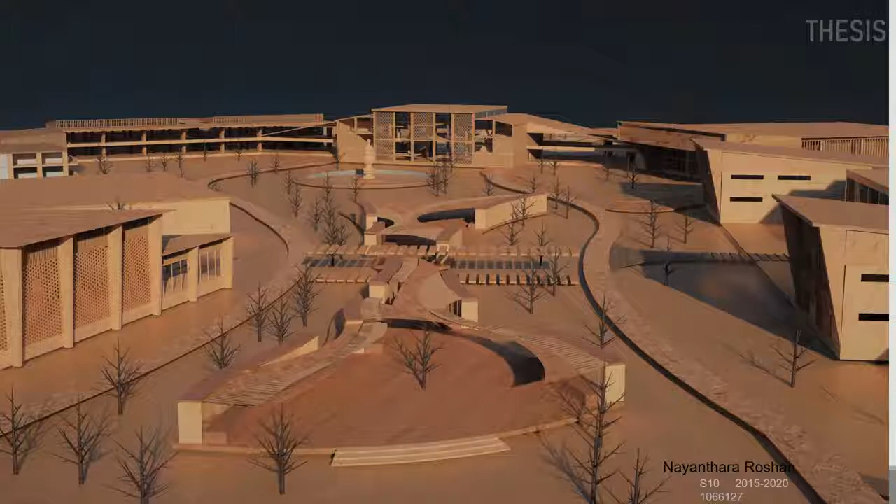Thesis topic: International Exhibition and Convention Center, an experiential event space. Submitted by Roshan.

The aim of the project is to bridge the gap between different user groups like students, delegates, and professionals by designing a single platform capable of accommodating versatile functions and stimulating resourceful interaction. Architecture that connects people. Flexibility, connectivity, and community are the three main parameters which are focused.

The objective of the project is to understand and design the center with multiple or versatile spaces to accommodate all types of events with an impressive balance of interactive spaces which will develop the overall working of the convention center, the space that meets the need.

KINFRA has put forward a proposal for instituting an international exhibition and convention center in Kakkanad, Kochi. Why Kochi? Kochi is to be a hub of the MICE industry. MICE, an acronym for Meeting, Incentives, Convention and Exhibition in the tourism segment.

Convention centers receive guests from local, national and international markets which depends upon the type of events that are hosted, the delegates, the exhibitors, the staff and the visitors.

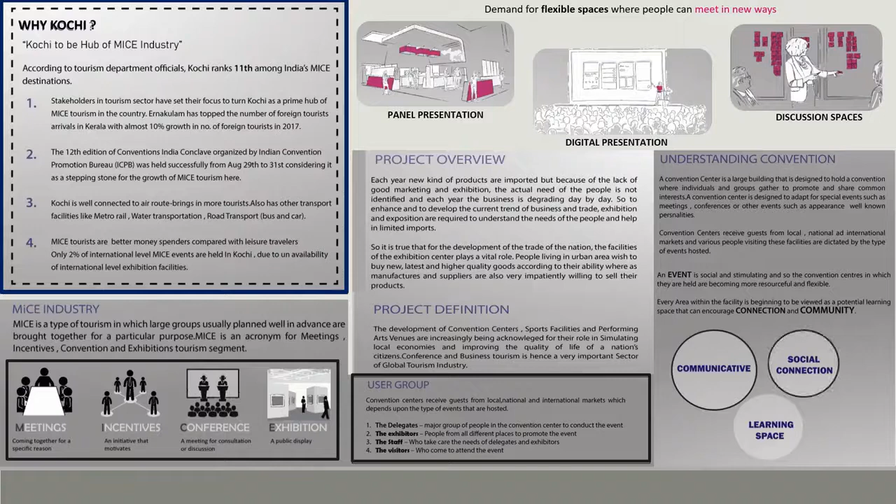An event is social and stimulating, and so the convention centers in which they are held are becoming more resourceful and flexible. Every area within the facility is beginning to be viewed as a potential learning space that can encourage connection and community.

The parameters to be considered while designing are: 1. Making flexibility a priority. 2. Centers are an extension of destination. 3. Public areas for public discourse. 4. Healthy and stimulating plan. 5. Neighborhood development plan. The design should include 3 concepts of design: open plan, cluster and courtyard.

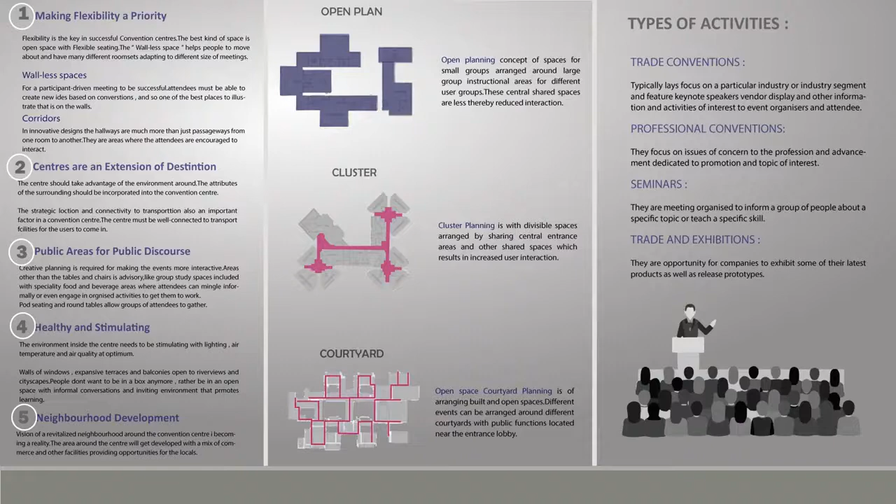The type of activities are trade conventions, professional conventions, seminars and exhibitions. In short, here are 6 typologies of spaces which are to be included in designing a convention center.

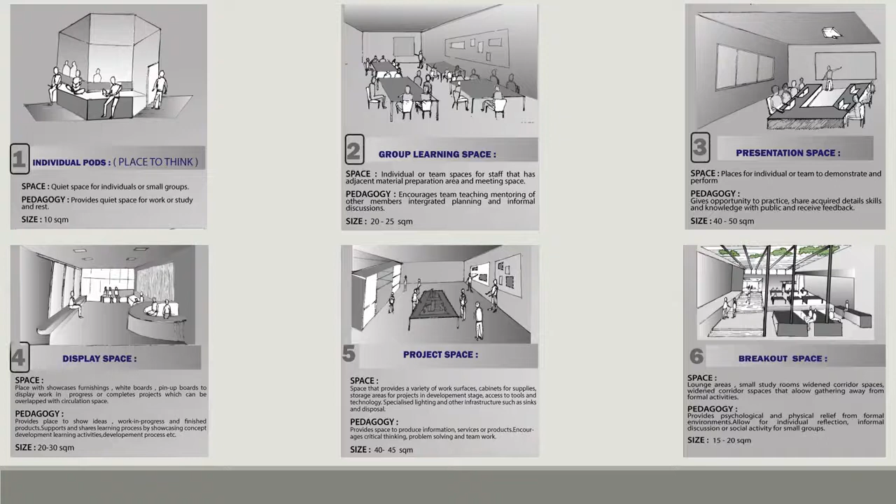1. Individual pods. 2. Group learning space. 3. Presentation space. 4. Display space. 5. Project space and 6. Breakout space.

The location of the site, a 41-acre land, is in Kusumagiri, Kakkanad, mainland near to Infopark Development Phase 2.

Local area analysis. The site can be accessed by different modes of transportation, both public and private, where all the necessary requirements can be reached within a 5-kilometer radius, with the airport and railway station within a 20-kilometer radius.

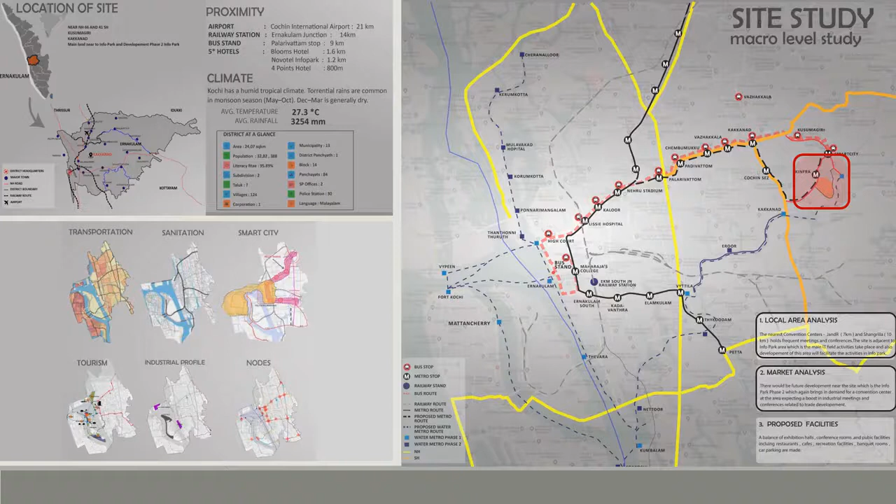Market area analysis states that it would be the future development area near the site, which is the Infopark Phase 2 development and water metro.

The site is located in a commercial zone with a negligible contour level of less than 1 meter, thereby taken as a flatland. Road network: the northern side of the site lies on the primary road, which is the Infopark Expressway, which connects to the Seaport Airport Road.

Movement. Bus service and metro rail service is available in front of the site. Land use. Infopark lies within a 1 kilometer distance, which is a major IT hub where the majority of users are expected.

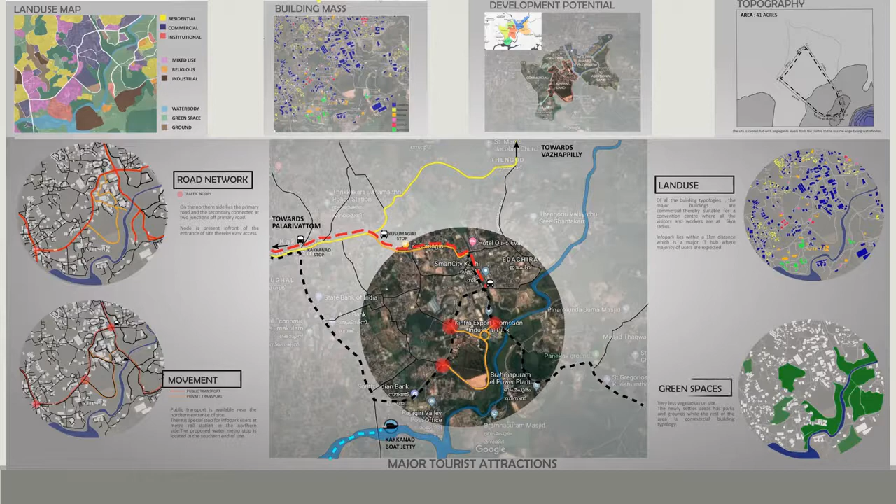Green spaces. There is very little vegetation on the site and in the neighborhood, where the rest of the area is a busy commercial zone.

Major attractions of the site. The site is located adjacent to the IT hub Infopark, which is a major development area where the majority of the user group is expected for the site.

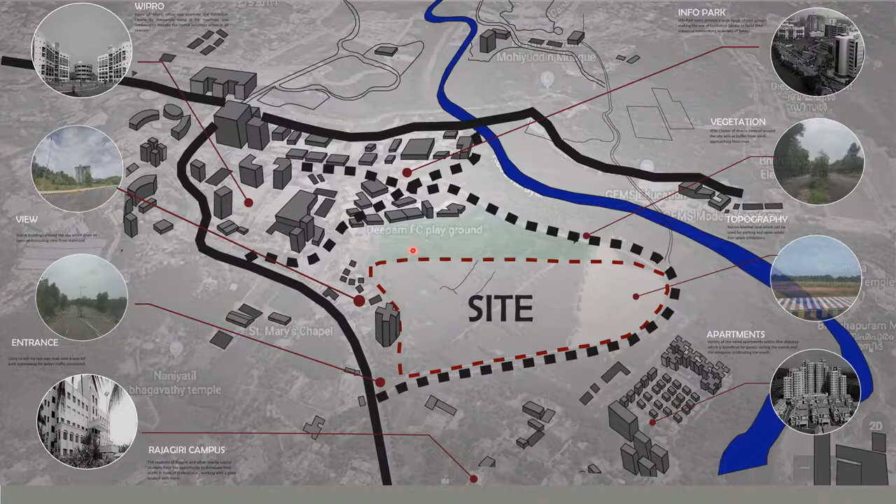The site also lies adjacent to the Rajagiri campus on the northern side. Within a 5-kilometer radius, different accommodation facilities and modes of transportation are also available.

Micro-level study. Sunpath: the orientation of the site is in the north-south axis, which receives maximum sunlight and wind. Circulation: the circulation is possible from several points as the site is abutting the road on all 3 sides, which helps to handle traffic.

Vegetation. There is currently very little vegetation within the site, with a cluster of acacia and taro leaves.

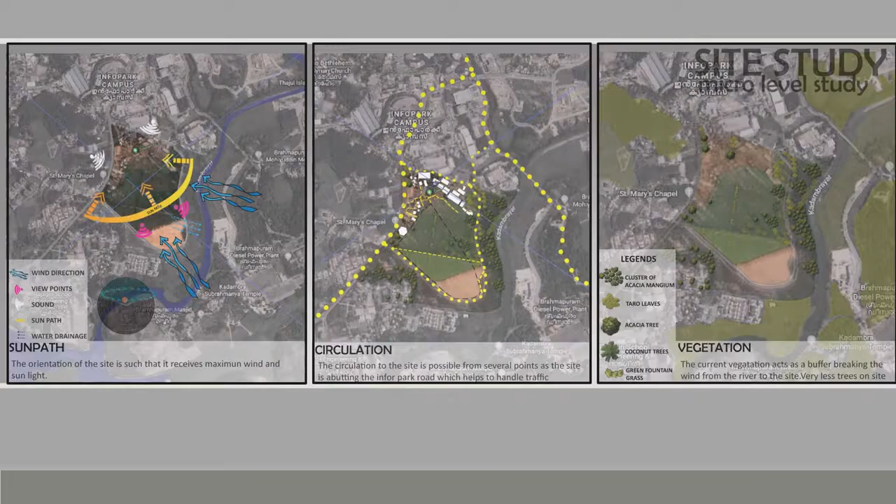SWOT analysis. Strength: Accessibility. Availability of various transportation facilities makes the site easily accessible to the public. The site is abutting the road on all sides, which helps to connect the major nodes and junctions.

Site context. The context of the site mainly acts as an industrial development area, which is key for commerce. Immediate context: within 5 kilometers, different accommodation facilities and modes of transportation are available.

Weakness. Groundwater: the site is a flat land with negligible contour and lies in a low-lying area which can cause flooding during the time of rain.

Waste disposal. The site is located near the Brahmapuram area, which is currently a large waste disposal zone for industries and the public. Opportunity: Site context.

The site is located adjacent to the IT hub, commercial street and institution, where there is a wide range of user groups.

Threat: traffic. Due to the wide range of events and scale of the project, there may be traffic problems on the Northern Artery Road.

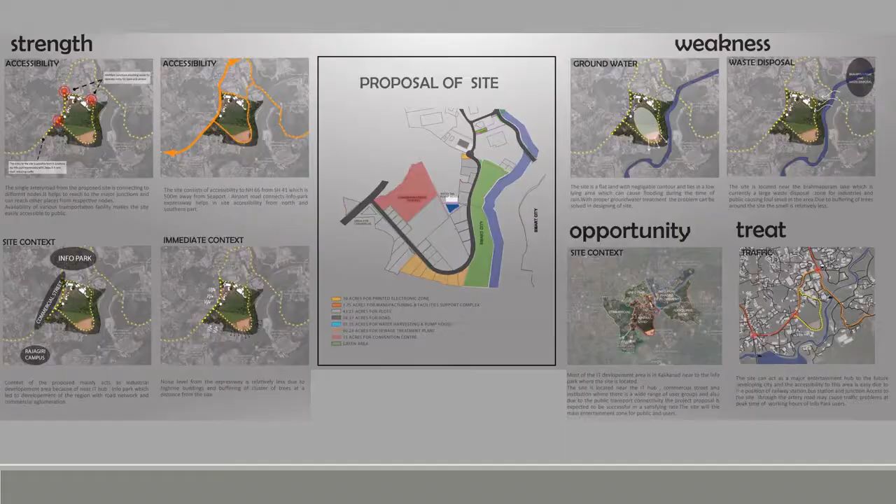Design strategies. The key concept of the project is to connect users, context, and building. This is done by bringing connection between the private and public meeting zones by creating common sharing spaces as thresholds.

The common sharing space here is taken as a green belt which separates the private and public zones. The private zone consists of the administration area, accommodation and food for VIPs, and the executive zone with meeting and conference rooms. The public sector is split into three zones: student zone, exhibition zone, and multipurpose halls.

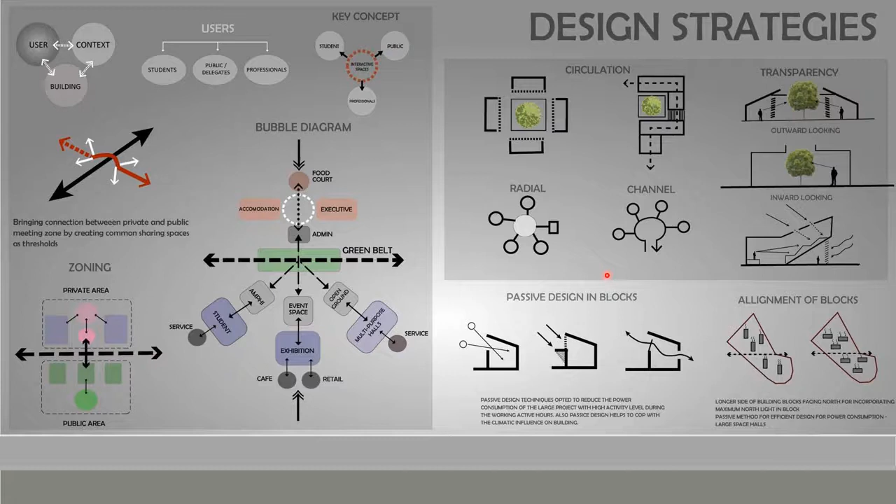The circulation planning is done in two methods: radial pattern and channeling. The design is to be transparent with both inward and outward looking designs. Passive design techniques are also opted to reduce the power consumption of the large project with high activity levels during peak hours.

The evolution of design. Multiple access is provided to the site from the major abutting road for various user groups. Two major entry points are placed on the north and south sides, with a focal point placed centrally. The green belt splits private zones to the north side and public zones to the south side, with multiple access points.

Circulation is worked out within the public and private zones. Built height increases from north to south with respect to the typology of events. Open space courtyards are worked within the private and public areas respectively.

At present, the site lies adjacent to the Infopark development area, which is the major node. The site abuts the road on three sides, where the Infopark Expressway is on the northern side. The site can be accessed from the north and south sides by two major junctions, Junction 1 and Junction 2. The site is surrounded by commercial development and other accommodation facilities.

On the eastern side of the site is the Kadambrayar River, where thick vegetation is present in the southeast part of the site. In future, with the establishment of the project, the junction lying in the northern part of the site will develop as a major node for transportation and will also act as a landmark.

The road between the commercial plots will develop as a service entry to the site. Due to the proposal of the water metro via the Kadambrayar River, Junction 2 will develop as a major node for a metro station. The southern portion of the site will be developed as a waterfront area with respect to the water metro proposal.

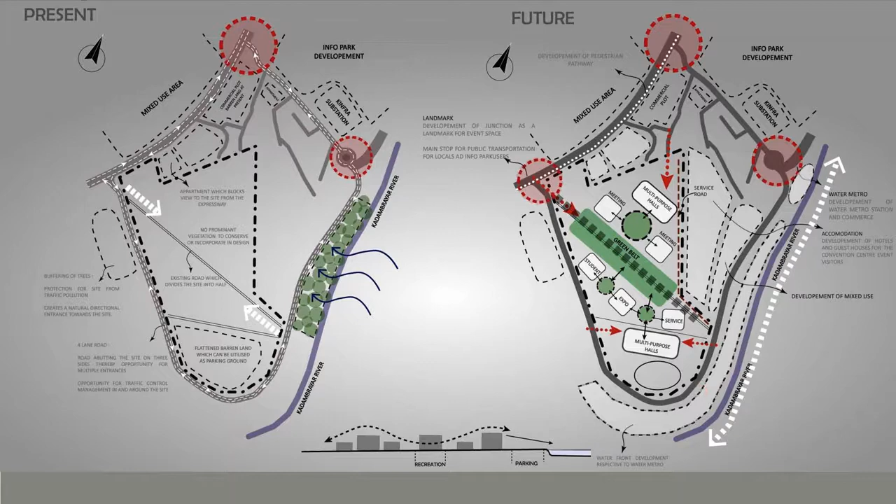Concept development. The key concept is to create interactive spaces through a radial pattern, by creating a focal point at the center - a green space - which then segregates radially into smaller courtyards where different functional blocks are connected.

The building spaces are designed as a transition from semi-open to closed spaces. This convention center has two main entrances, in the north and south, with a VIP entrance on the north side adjacent to the service entry.

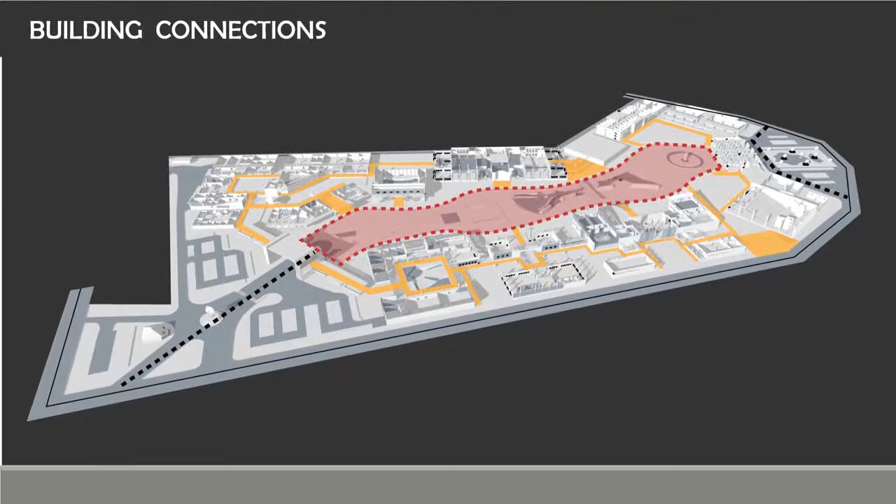Zoning. Phase 1: Executive. Phase 2: Educational. Phase 3: Exhibition. Phase 4: Service.

Interactive spaces. Here, the framework has been designed in three different typologies of courtyards. 1. Open plan typology: here, spaces for small groups are arranged around a large group installation area.

2. Campus typology: the general approach here is where different typologies of functions are grouped together and located in different blocks. 3. Courtyard typology: here, built and open spaces where different functional spaces are arranged around different courtyards in a linear pattern, connected by semi-open corridors.

Design moves. 1. Mixed functional groups: each cluster consists of different functions split out into shared open spaces and closed spaces.

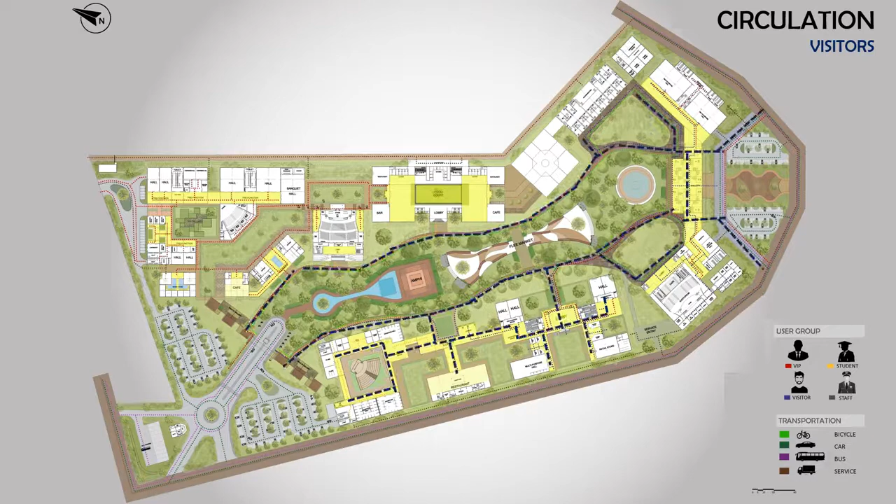The circulation of the project is developed in a loop pattern around the green space, which is the main core of the project. Central circulation pathways are designed, leaving the edges for halls and other rooms for view and ventilation, reducing air-conditioned space. The circulation path is in a loop form, also connecting to the courtyards, creating a transition from closed to semi-open to open spaces.

The central loop is completely pedestrianized, where vehicular access is restricted at the edges of the site. Off-street and basement parking facilities are provided, with over 2,000 spaces for 4-wheelers and 250 for 2-wheelers.

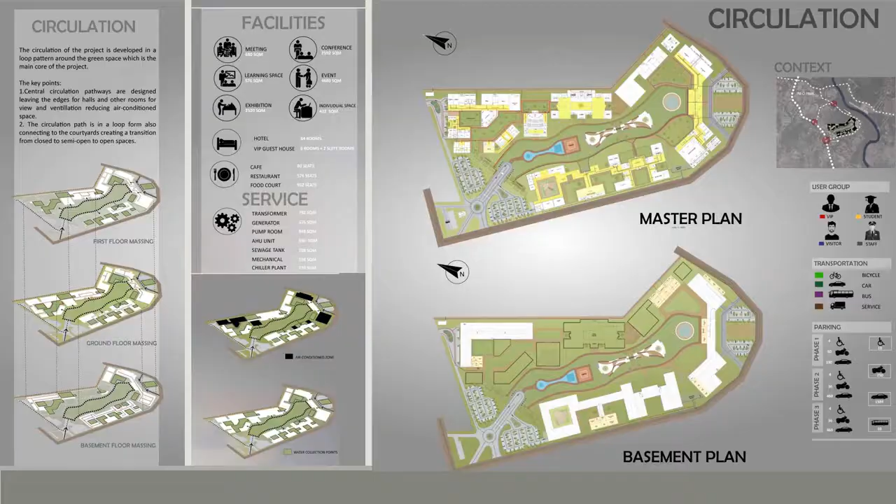Activity study: built spaces with different functions have respective courtyards for various typology of events.

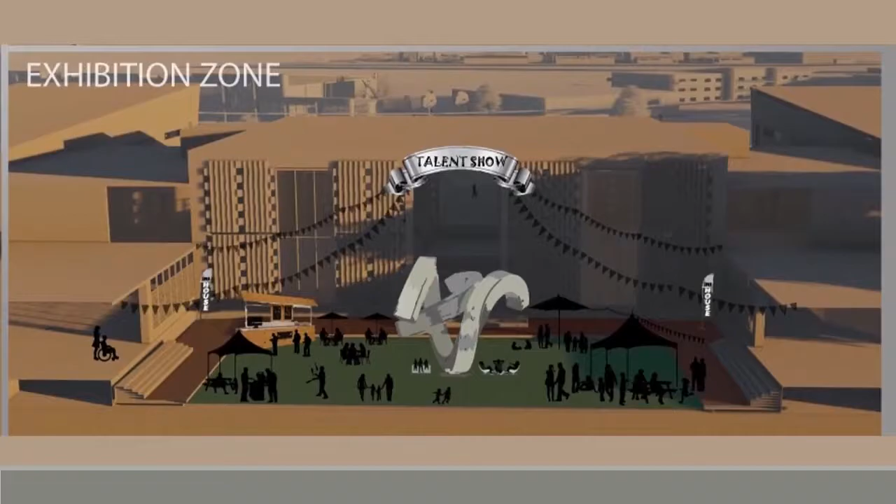User study: the strength of user population increases from north to south, from phase 1, 2, 3 and 4. As the intensity of activity level increases from north to south, the building height and area increases respectively from 3 meter to 4.5 to 6 meter and to 12 meter ceiling height.

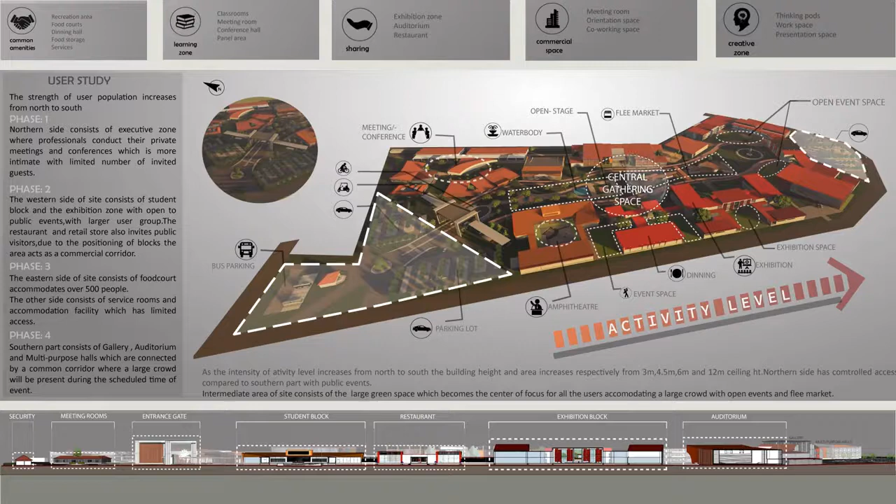The northern side has controlled access compared to the southern part with public events. The intermediate area of the site consists of the large green space, which becomes the center of focus for all the users, accommodating a large crowd with open events.

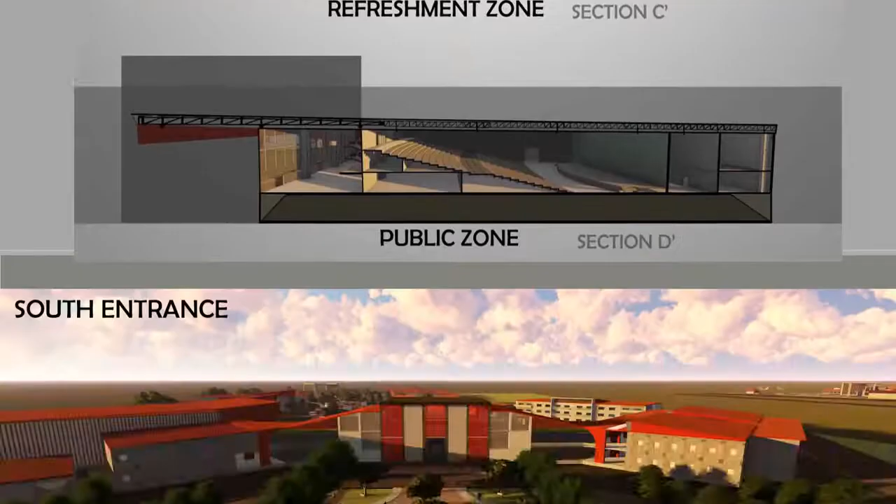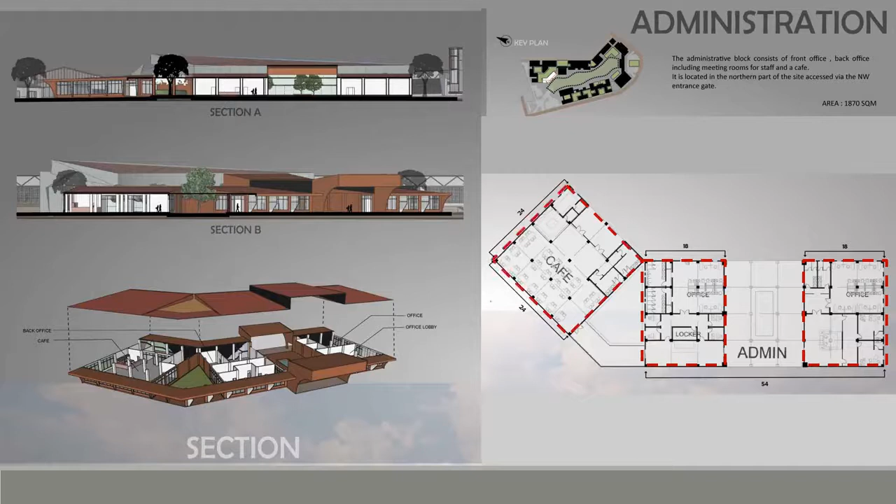The administrative block is located in the northern part of the site, accessed through the northwest entrance gate, with front office, back office, meeting rooms for staff and a cafe.

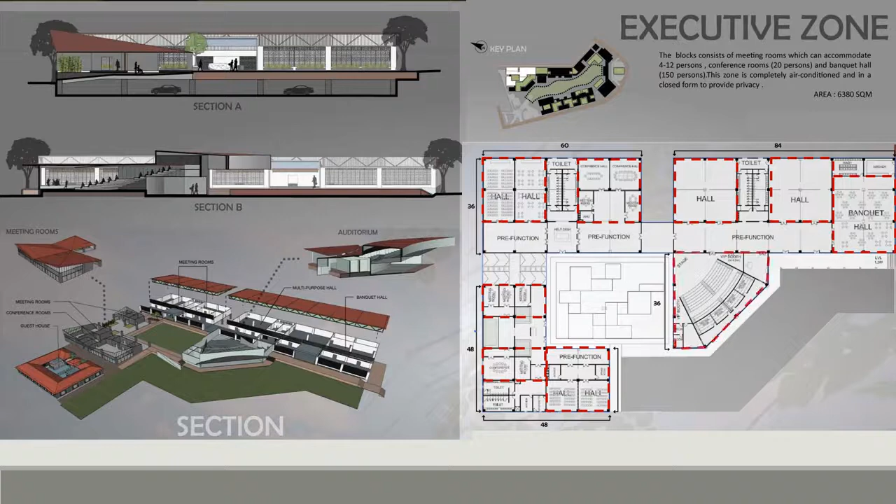The executive zone consists of meeting rooms which can accommodate 4 to 12 persons, a conference room for 20, and a banquet hall for 150 persons. This zone is completely air-conditioned and in a closed form to provide privacy.

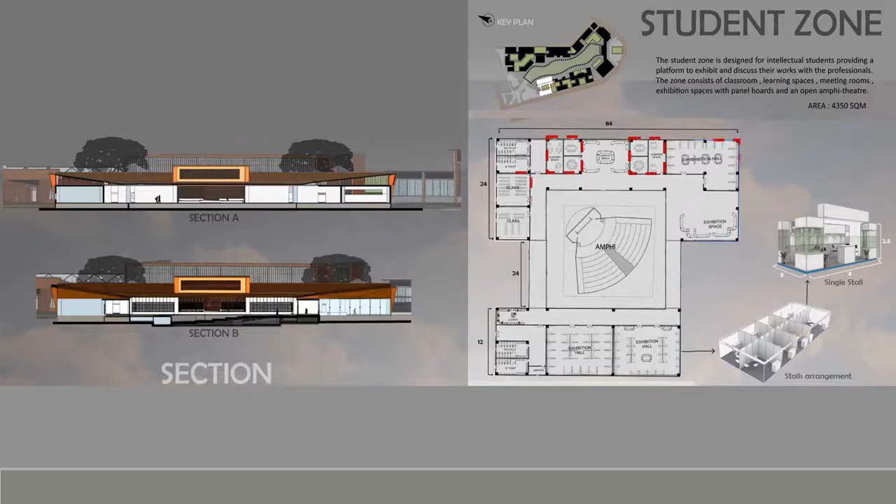The student zone is designed for intellectual students, providing a platform to exhibit and discuss their works with professionals. The zone consists of classrooms, learning spaces, meeting rooms, exhibition spaces, and an open amphitheater.

The restaurant block in the student zone is located between the meeting rooms and multi-purpose halls, which is accessed through the main lobby and through the courtyard. It also has seating capacity for 240 people.

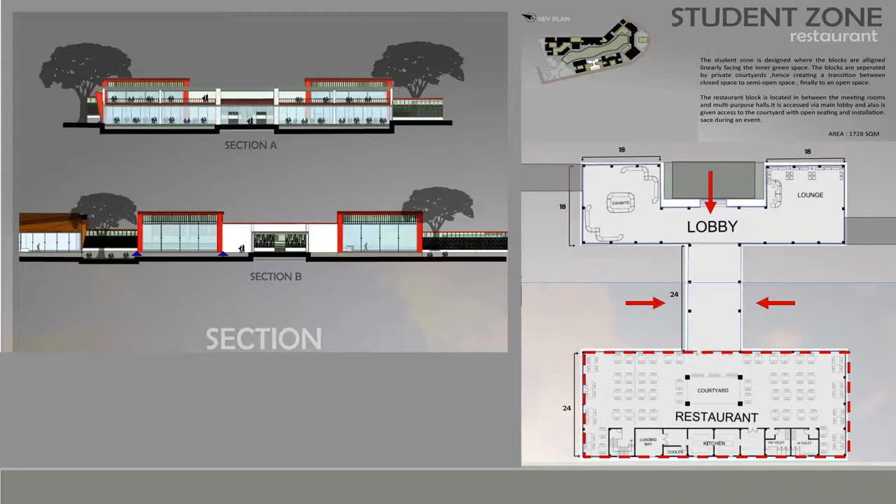The exhibition block is designed with multi-purpose halls, thinking pods, and a retail store. Visitors can book these multipurpose halls according to the availability and size of the halls. The halls can be partitioned into various arrangements according to the type of event.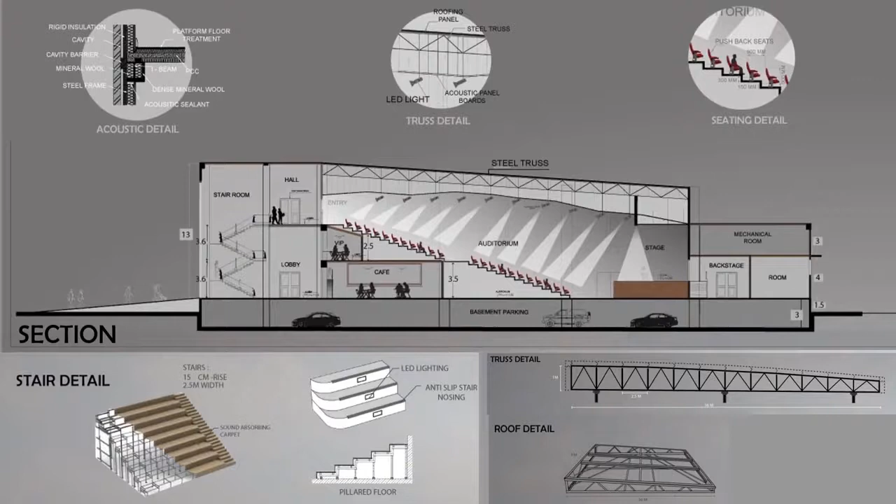The auditorium is located in the northern part of the entrance, adjacent to the admin, which has 950 seating and 215 for VIP. This auditorium seating rack is also below the ground level with a difference of 2 meters.

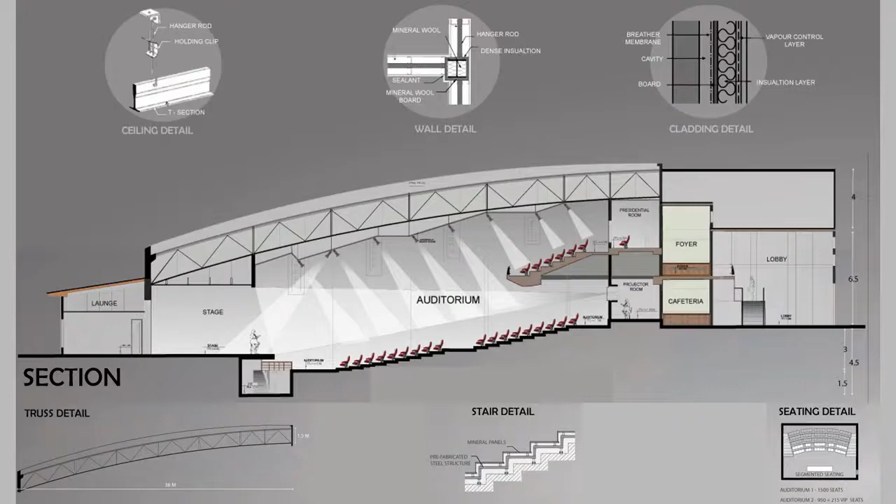The food court is provided with 3 entrances located at the very center of the site so every user can access it. It lies facing the central green space and the flea market, where it is considered to be the most active part of the whole convention center.

The gallery is located in the southern entrance of the site, which is designed using different floor levels where each section of floor is used as an exhibition space. The gallery has floors up to 10.5 meter high, where each floor is raised by 1.5 meter from subsequent floors.

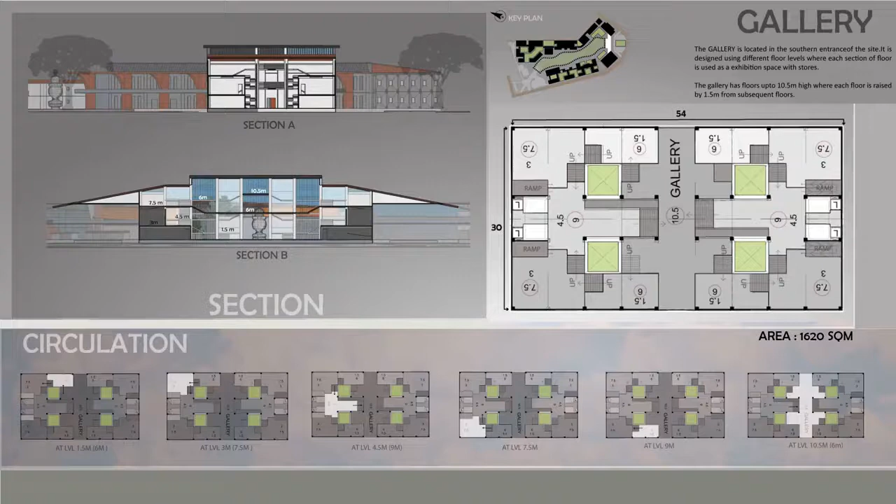The multipurpose hall is located in the southern portion of the site, which consists of 2 large halls which can be partitioned into various formations according to the type of event.

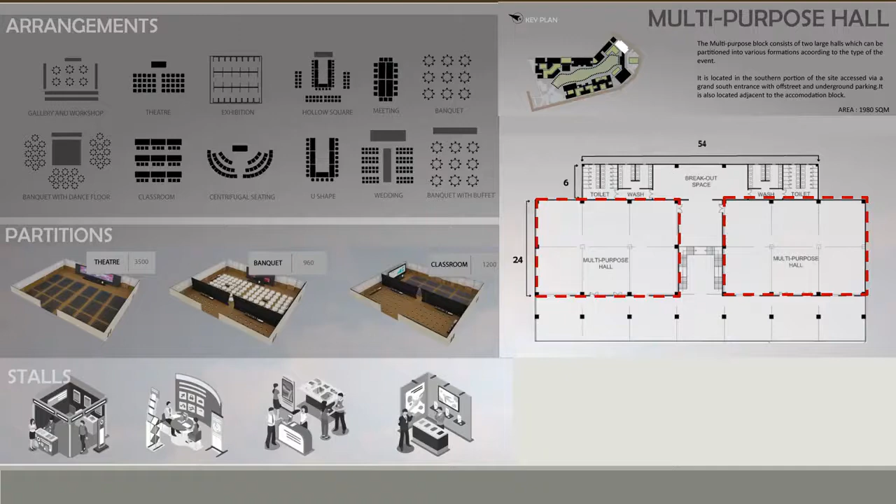Landscape: the courtyards are arranged around the green belt, which are categorized as public and private according to the functionality of blocks and events hosted. Each courtyard has its distinctive type of vegetation, hardscape and softscape according to the typology.